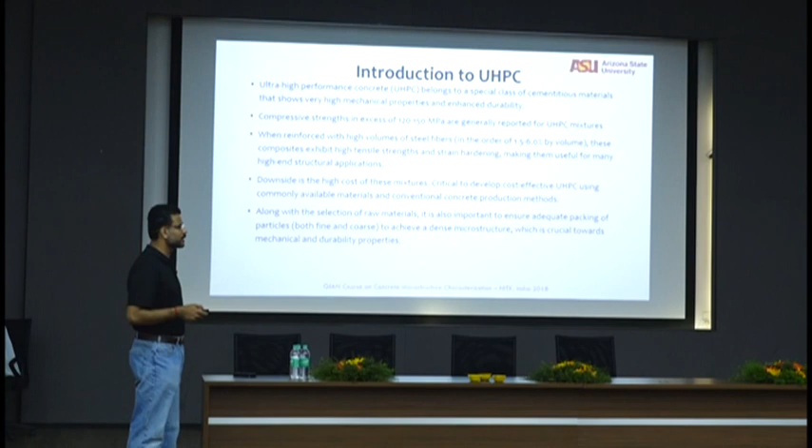We developed our own ultra high performance concrete for about $500 a cubic yard, one sixth the cost of Ductal, without using any fancy materials like quartz powder. We used only locally available materials, based on the idea of particle packing I talked about this morning. UHPC is about 120 to 150 MPa strength. When reinforced with steel fibers at 1.5 to 6%, it exhibits very high tensile strength and flexural rigidity, becoming strain hardening so it can be used for high-end structural applications.

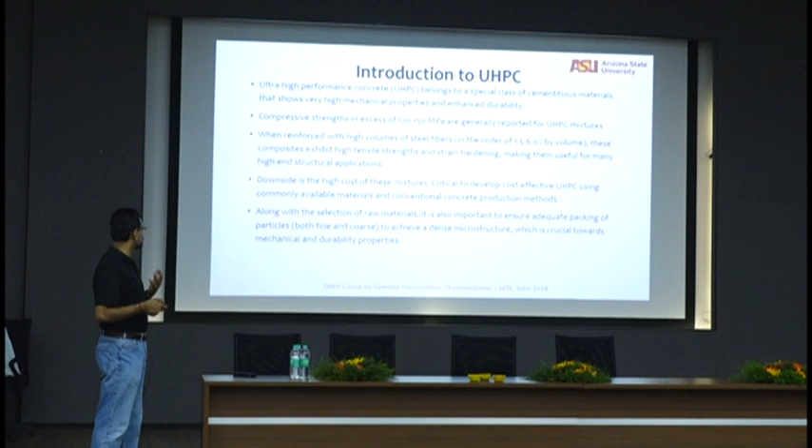The downside is the cost, as I said. So critical to developing cost-effective UHPC is really rational methods where you create a very dense microstructure. Basically what we've done is microstructural engineering to develop UHPC.

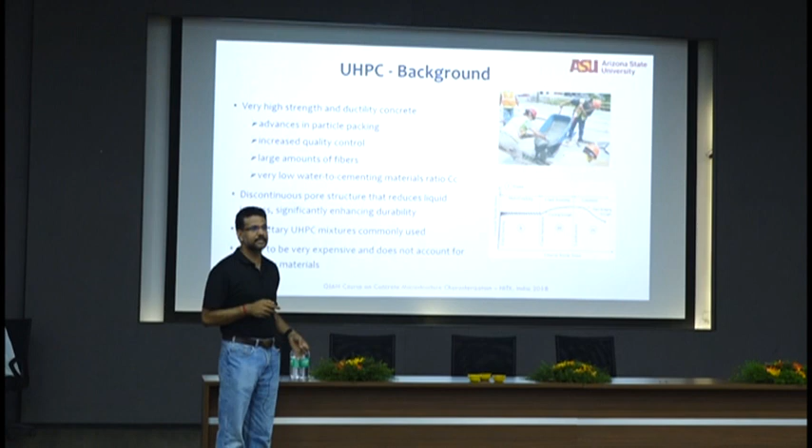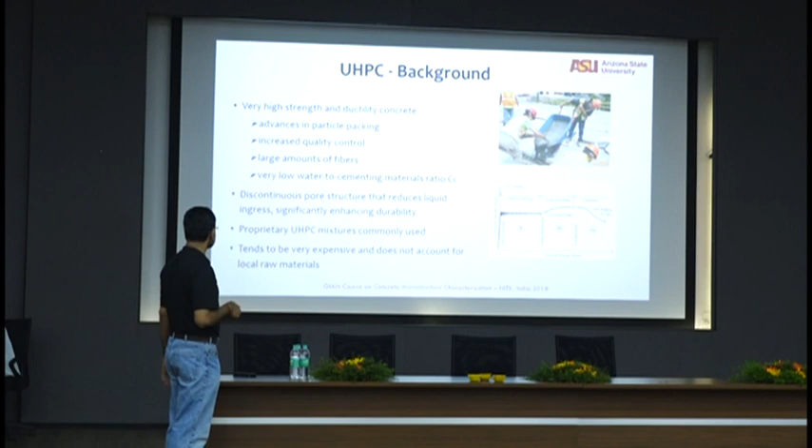So you need very good quality control in selection of materials and mixing. It requires really long mixing time, very high dosage of superplasticizers, and very low water-cementitious materials ratio. What I'm going to talk about is about 0.18 water cement ratio. These tend to be proprietary mixes, which tend to be very expensive, so we need an alternate solution.

Here are the materials we used, not all in every mix: OPC at 11.2 microns median size, slag at 8.9 microns (fine slag), fly ash at 17.9 microns, metakaolin at 5.3 microns, limestone at 3 microns and 1.5 microns, and silica fume. The idea is to use all these different particle size distributions to come up with an ideal particle size distribution covering a wide range of sizes.

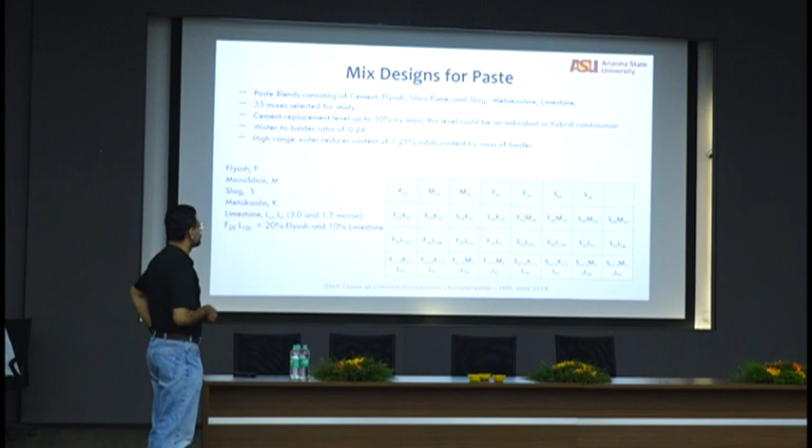So we get really compact, dense mixes. We started with cement, fly ash, silica fume, slag, metakaolin and limestone, creating a large matrix of about 33 mixes, with cement replacement levels up to 30% by mass, and we've even gone up to 50% effectively. We started with a water-binder ratio of 0.24 and went down to 0.18, with high range water reducer of 1.25% solids by mass, translating to about 5% superplasticizer by weight of cement. Very high amounts of admixtures.

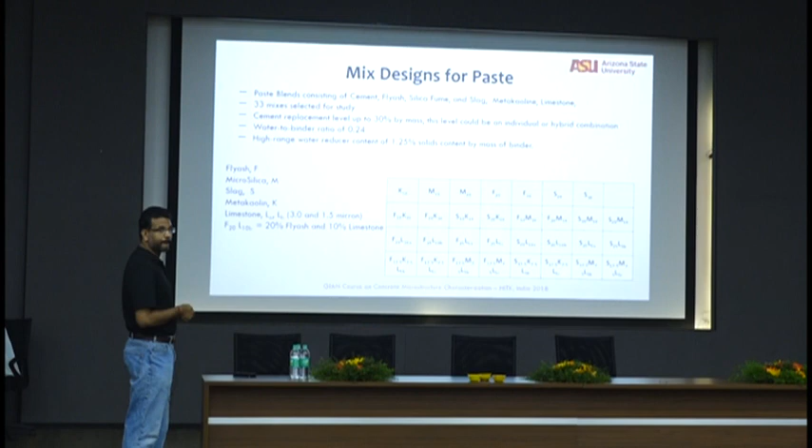This limestone was used in powder form, limestone powder, as I've shown you previously here. 3 micron powder or 1.5 micron. This is 3 micron powder, this is 1.5 micron powder, really small powder.

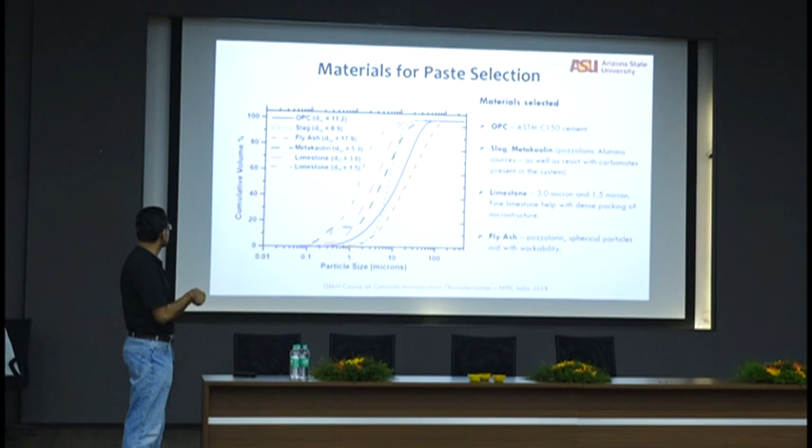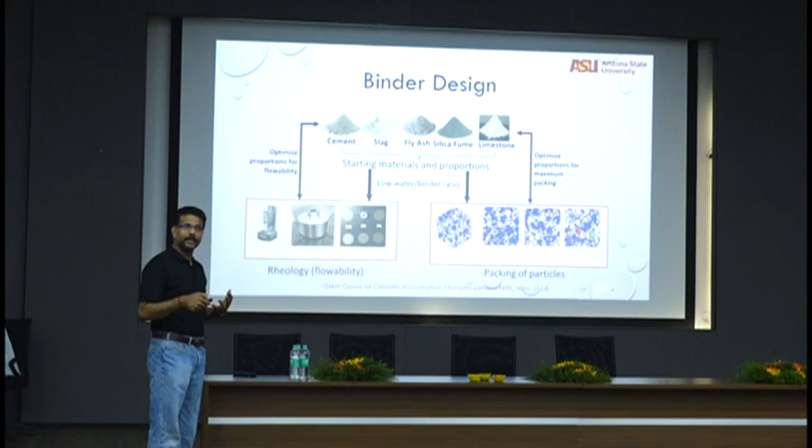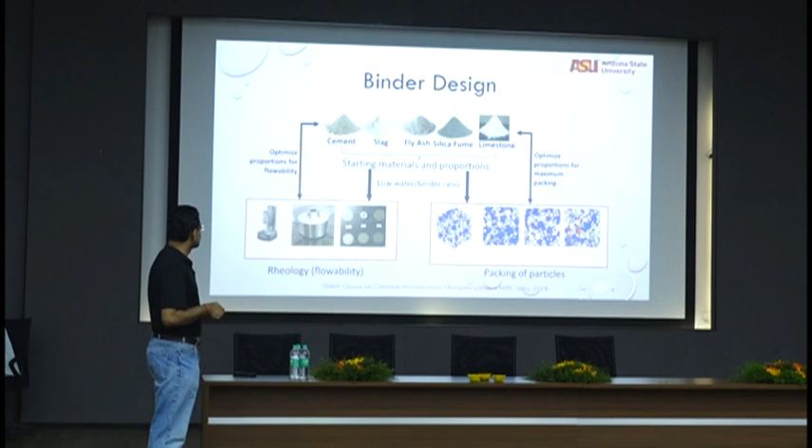So you have all these mixes. The idea we used was to combine them to create the particle packing we talked about. We created a computer model where we can throw in all those particles and find out where each of them are and how they will all pack nicely. The blue I'm not sure, but generally white is cement, blue is probably fly ash, the red ones are metakaolin, the green ones are limestone. So you have all those different combinations of materials.

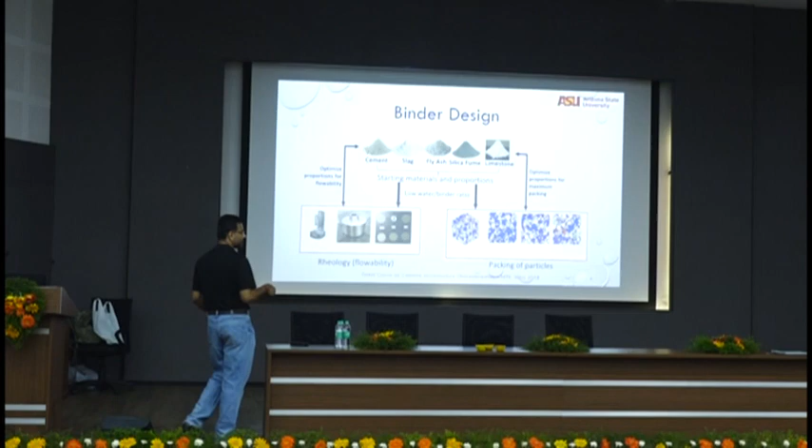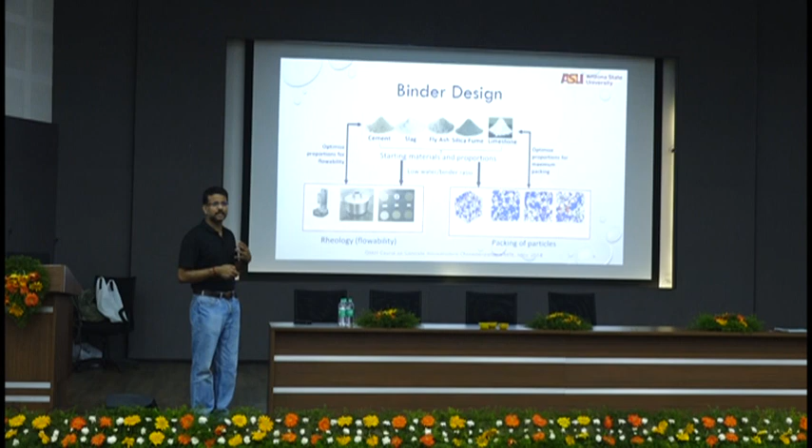And then we wanted to check for rheology also, because this mixture needed to be really fluid and flowable. Along with that, your water cement ratio is 0.18 and you really needed very good workability.

So all mixes had particle sizes ranging from 0.1 microns to 50 microns. We created a representative three-dimensional volume by filling particles so that we could try out a large number of combinations based on the PSDs.

This was a computer program that one of my students wrote, called a recursive packing model. People have done it before, but we did it slightly differently. Basically, you tell it what particles have to be filled and how much of each. The program automatically picks a particle, puts it in a certain location in the cube, then picks the next particle, and keeps picking particles until the cube is full.

If the cube is full, it picks the next particle, and according to the proportions you've given, if it doesn't fit, it will try to rearrange the other particles to fit it. So it goes through a recursive algorithm, probably one or two million steps, to come up with a complete packing and tells you what the packing fraction is.

So we consider all particles as spheres for sake of ease. Angular particles would take a lot of time to do these models.

So these particles that the computer takes are unreacted, right? Yes, this is fresh state. Packing always happens in fresh state. That volume might change, so what? If I get the maximum packing to start with, I'll get the maximum packing to end with, because what you need is the densest possible microstructures.

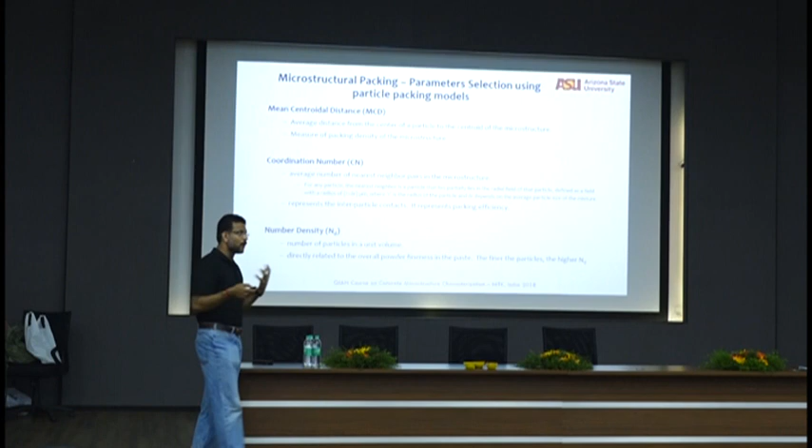Now, why is the distance between particles important? Because reactivity is governed by distance. The fly ash has to react with calcium hydroxide, and it has to have a certain proximity to react.

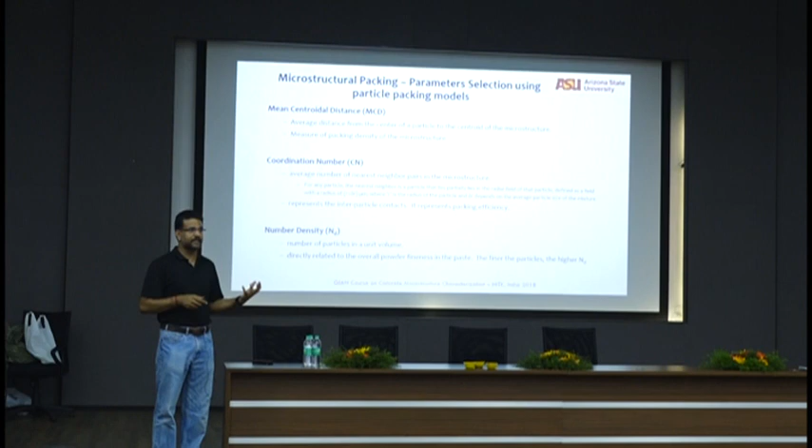So that's one thing. The second one is coordination number: how many particles are touching any given particle at any given time? Again, a measure of reactivity. And the number density is the number of particles in a unit volume, which tells you how much filling you have.

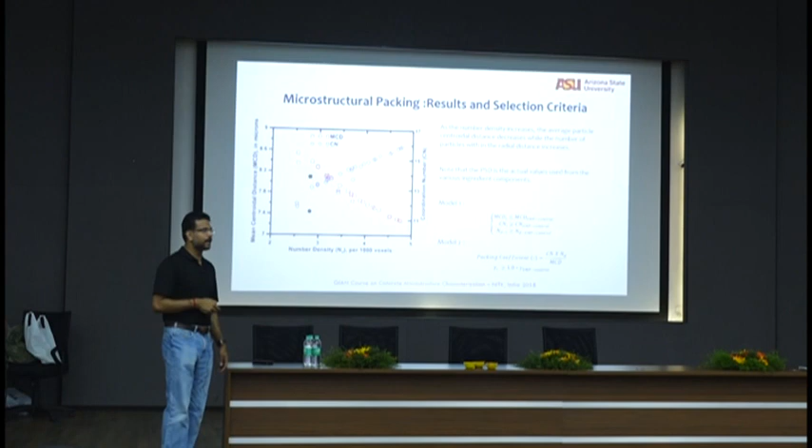We came up with different models that relate centroidal distance, number density, and coordination number. We also came up with the packing coefficient, which is the product of coordination number and number density divided by centroidal distance, so that you can maximize this to get really good packing. And then we did plastic viscosity and yield stress using rheometers for rheology, and mini slump values.

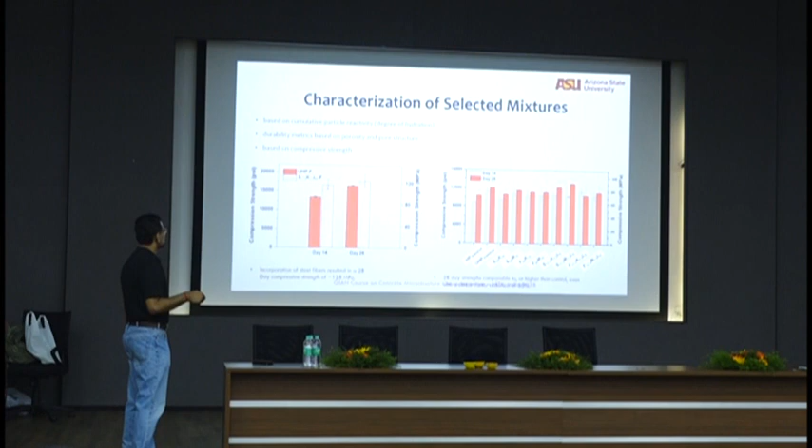So these are just the compressive strength of the 0.24 water cement ratio paste. You got up to only 120 megapascals, and these are for the paste. We're okay with that because this was the paste with the 0.24 water cement ratio.

Then we started to mix the aggregates. Normally in UHPC, people don't use coarse aggregates, they use only sand. But the problem with using sand is that shrinkage becomes an issue. When you have a higher cement content, shrinkage is going to be a problem. If you use coarse aggregate, the structure is more stable, the aggregates are more stable. So I wanted to use coarse aggregates, and we designed it that way.

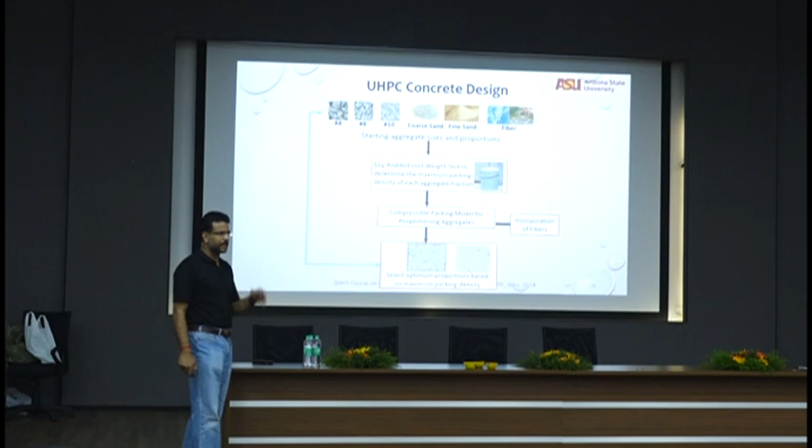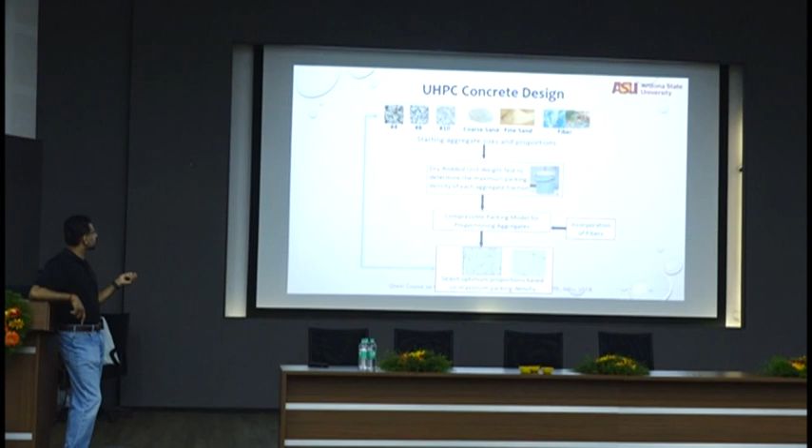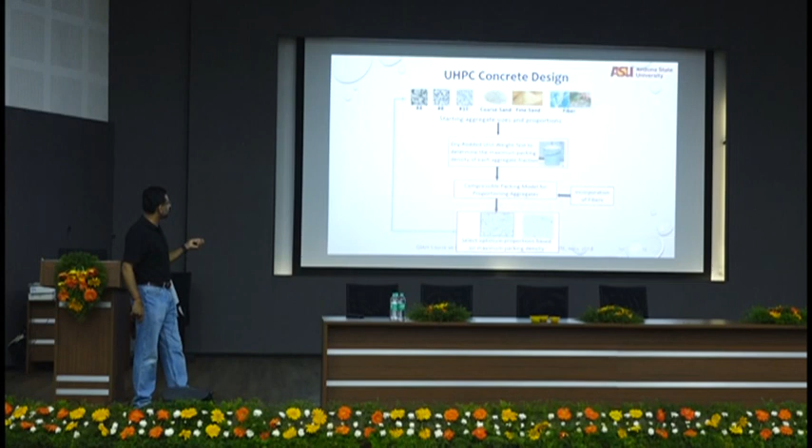This is among the few cases I've seen, I haven't seen many UHPC publications or applied UHPC projects where people have used coarse aggregates, but we have indeed used aggregates passing 9.5 millimeter retained on 4.75, passing 4.75 retained on 2.36, and passing 2.36 retained on 1.2. We also used a coarse sand and a fine sand. Coarse sand is 600 microns, fine sand is 300 microns, or 800 and 400, one of those. And then we use steel fibers.

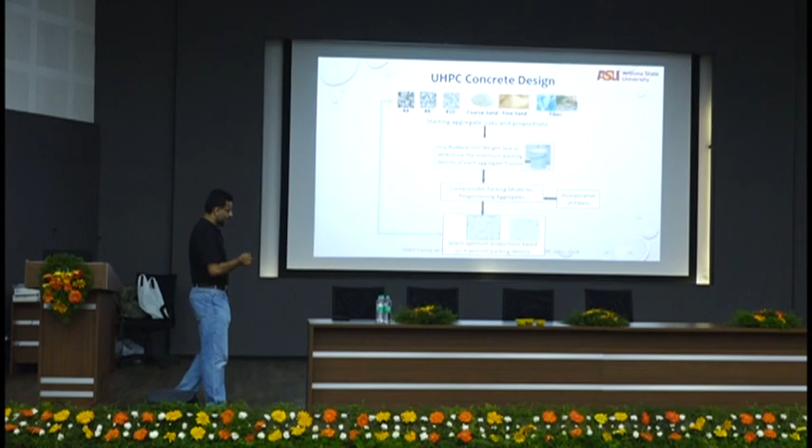We use what's called a compressible packing model for proportioning aggregates, and I'll talk to you about what that is. Then we created a space in which we can start to select the optimum proportions of these aggregates based on maximum packing density.

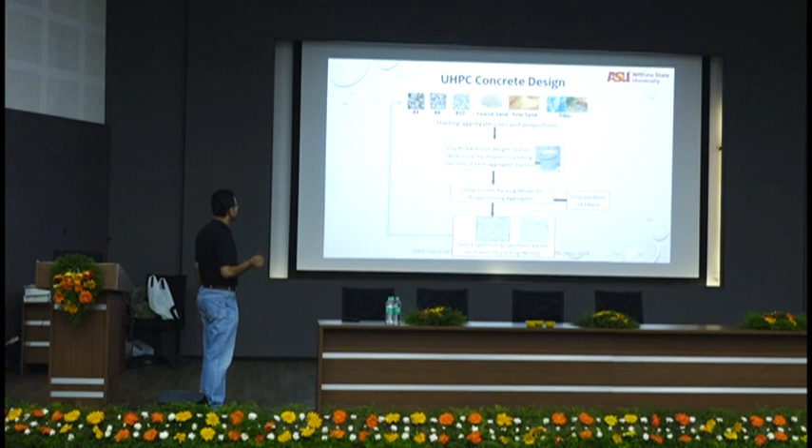So, again, I showed this in the morning. If you pack particles one by one and change the sizes - I've shown only one size, but you can have multiple sizes - even then, your maximum packing fraction is 74%. Randomly, if you start putting in a microstructure, what you get is 70%, but that's not enough for us. So you have to go to a higher value. If you use multiple sizes, you can go all the way up to 0.84, which is actually good.

So basically, what we have is mono-sized particles versus multiple particle sizes. But these are carefully selected particle sizes. Particles have been sieved for all the sizes so that you know exactly how much of what particles are there. That's where the cost increases, because you have to employ somebody to sieve this, separate the aggregates, and store them. A normal ready-mix operation cannot do this unless they are given more resources.

In a concrete mixture, aggregates cannot be placed one by one, so you have to get virtual maximum packing density through compaction and vibration. That's why you compact, right? You compact and vibrate, because just by placing, you will not get maximum density.

So we use 5 different classes of aggregates, and we use steel fibers 0.6 mm diameter and 13 mm long. These are the aggregates, and we had to wash and clean them so that the aggregates are really clean. Remember, every little impurity, every little defective spot is going to cost you when you're looking at very high strength concrete. When you look at 150 megapascal, it becomes tougher and tougher.

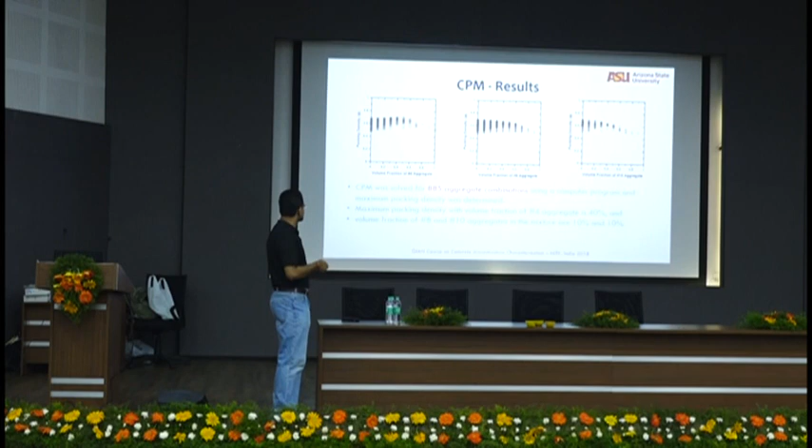And the best density was a 0.696 packing density. This is only aggregates, no cement paste here: 40% of number 4, 10% of number 8, 10% of number 16, and 20% and 20% of fine and coarse sand. 0.696 - that was the aggregate combination we used.

So you can see with all these combinations where the maximum packing densities are, so we can pick it up from there and use the packing densities.

So these are the common aggregates that you can get in the US. They call them by - I don't know how it is in India now - but they typically go by these numbers: number 57, number 67, 78, 89. These are the typical sieve numbers of the aggregate sizes. 57 is very common, but look at typical packing densities of those aggregates. If I choose a standard 57 number stone that they use for regular concretes...

My packing density is only 0.55 to 60. With 89, I get up to 66. But here I get up to 0.696, which is the higher packed density. And then you put in fibers, and when you put in fibers in an already packed mix, the packed density goes down because these long fibers try to push the aggregates away - they create more space. So you have to account for that also.

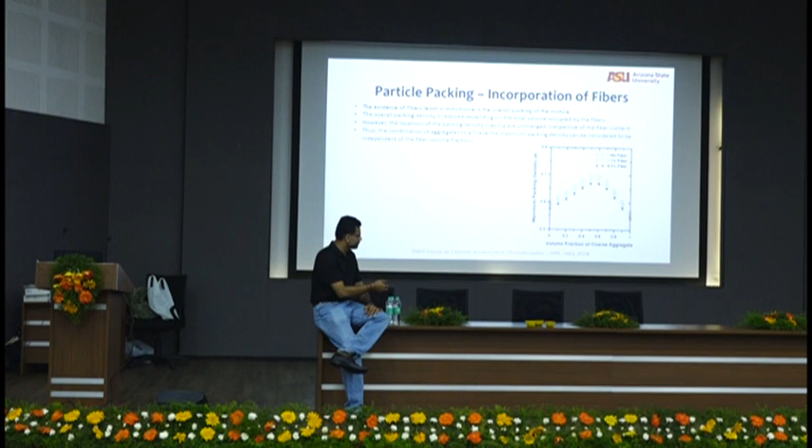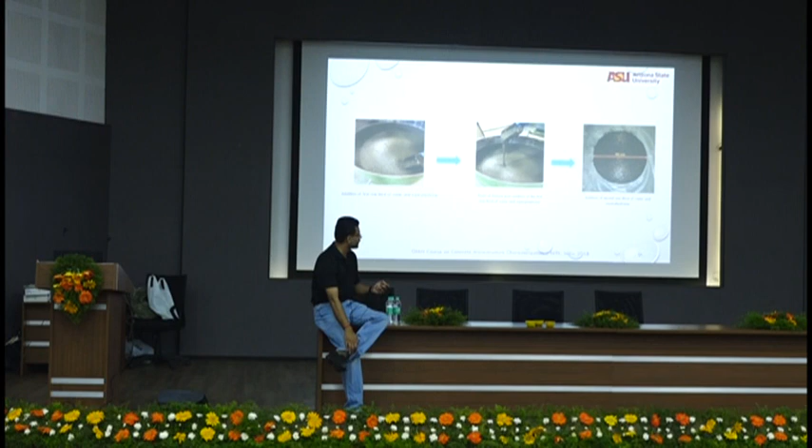Now if you look at it, you can get 28 day strengths of up to 160 megapascal for a mix with fly ash, microsilica and limestone. That's it - 17.5% fly ash, 7.5% silica fume, 5% limestone and OPC. So 30% replacement of cement, you get about 160 megapascal.

Here is a mix with 50% replacement of cement - 30% fly ash and 20% silica fume - you get about 140 megapascal strength in 28 days. Again, because you have fly ash in these mixes, you will know that at 90 days this will be even higher. I'll show you, I think I have that data.